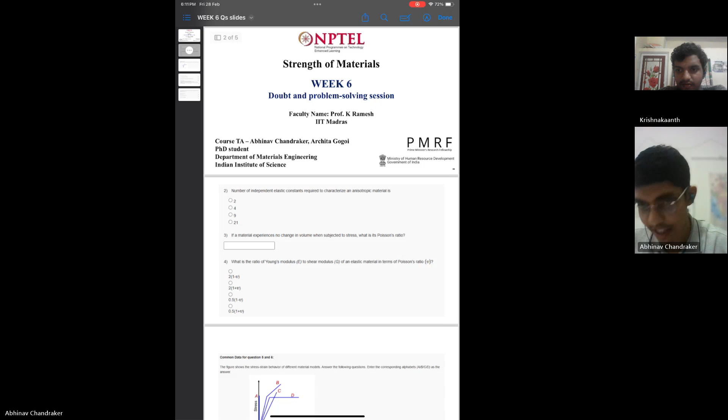So were you able to go through the video lectures? Yes, it's done. And actually, I wanted to complete the assignment within 6 o'clock, but it is only quarter done. Okay, I think if you have seen the video lectures, assignments are not so difficult, you can quickly go through them. The lectures are more time taking, slightly.

So let's just, I'll quickly summarize, I'll not take much time. Then, if you have some doubts or something you want to discuss, we can look at that.

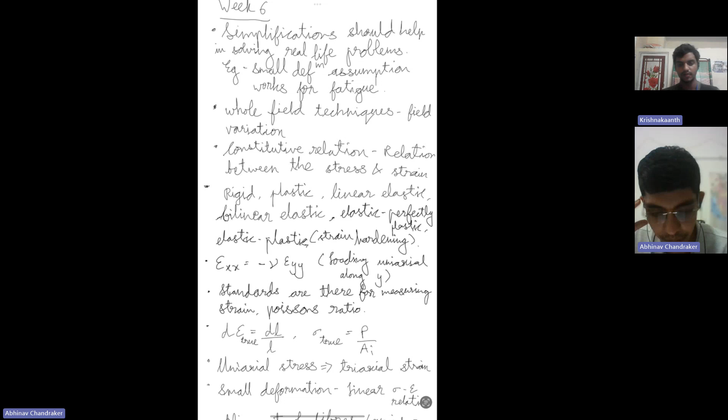So these are some points I had noted down which I felt were important. Firstly, most of the calculations or derivations we are doing are based on the assumption that we are considering only small deformation, so most of them are only applicable for linear elasticity. But these simplifications are also many times applicable for real life scenarios, for example in fatigue. So many times it's okay to make such simplifications.

Then we have certain techniques called whole field techniques, in which we can measure the variation at various points simultaneously, for example when measuring strains. So such kinds of techniques are called whole field techniques. You can also get the directional value of what you're measuring, as well as measure it at different points.

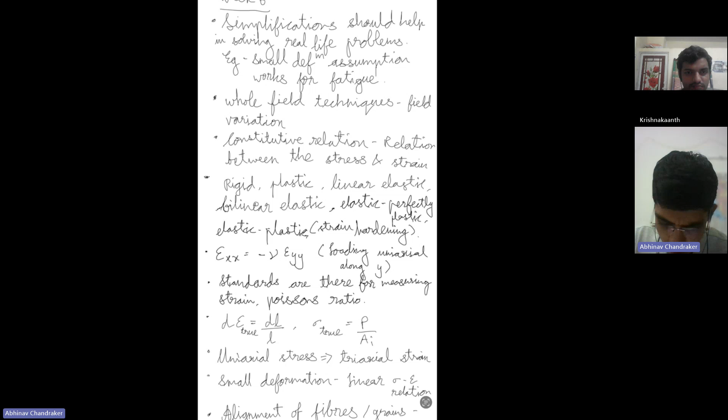Then there is something called constitutive relation. I'm not sure of the exact definition of it, but it's a relationship between different entities. For example, a relationship that you write between stress and strain, which is a theoretically developed relationship, is called a constitutive relation. We'll see what that relationship is in the next few points. If you have any questions related to any of these from the video lectures, you can ask me.

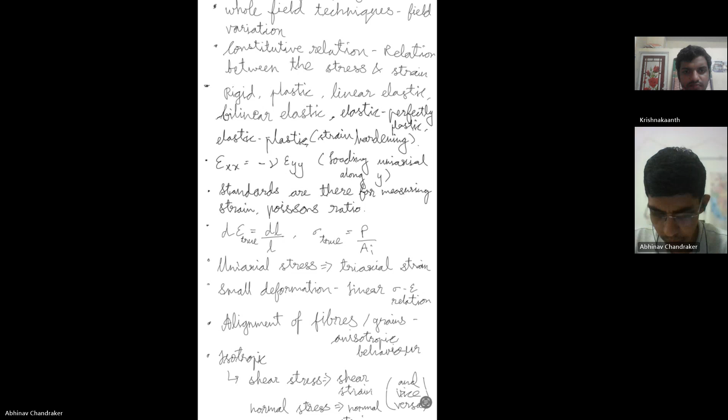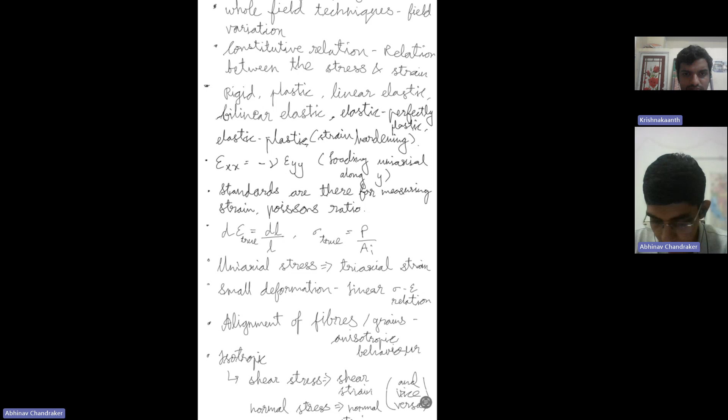Then in the lecture, sir has categorized the deformation behavior of different materials into some different buckets. Like you can have rigid materials which do not deform, then plastic materials which are 100% plastic, so they will deform without any requirement of higher stresses. We can have linear elastic, which show linear stress strain dependence. Then bilinear elastic, with two different slopes in their graph. Then it can be elastic followed by perfectly plastic, elastic plastic, which involves some strain hardening. So these are just some categorization, simplification of a kind for doing modeling or for using these assumptions for further modeling of materials.

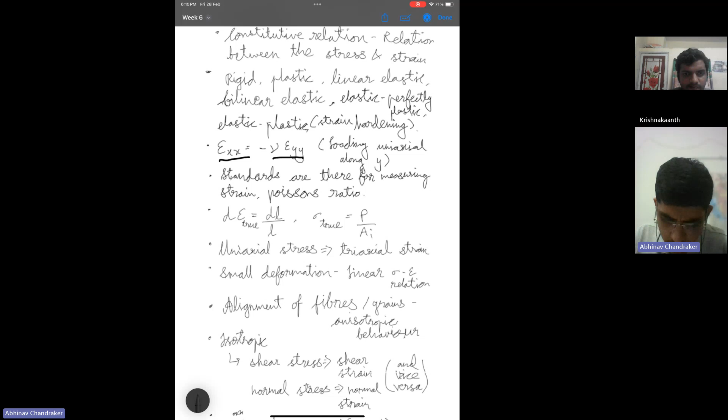Then we'll see the concept of nu, the Poisson's ratio, and this is the definition of it. It's negative of the strain in axial direction by... sorry, it should be the strain depends on how you load it. If it's along y, then it's negative of strain in x by strain in y. And it will be used a lot to form relations between stresses and strains.

Then we have certain standards for measuring them, just like we had standards which were discussed when covering strain gauges. Some bodies are there which come up with standards. Similarly, we also have standards for measurement of Poisson's ratio.

Sir briefly covered true stresses and true strains, which are somewhat different from the engineering stress and strains we were dealing with till now. These are more like instantaneous values. So d epsilon will be dl by L, where L is the instantaneous length. Similarly, you take the area in your sigma expression as the instantaneous cross-sectional area of the material.

Sir stressed that if you are applying uniaxial stress on any material, you should not assume that the strain also will be uniaxial, because due to Poisson's ratio, it will have some strain in the other directions also. So the strain will generally be triaxial.

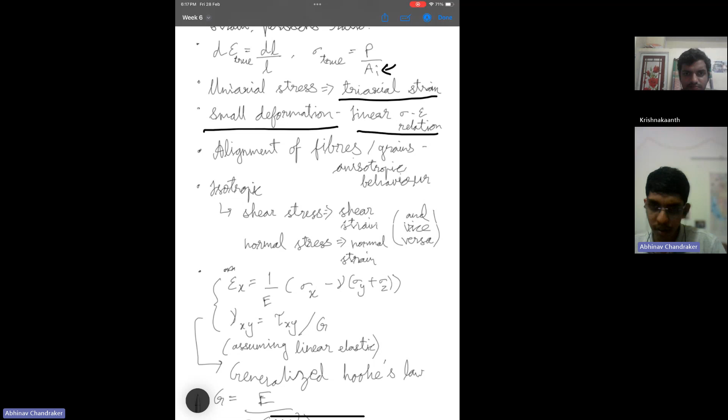Then we looked at how alignment of fibers or grains can lead to anisotropy in behavior, which can later lead to differences in the stress strain relationship. So if you want to model such materials, you have to take into account how the relationships between stresses and strains will change, because the elastic constants will change. All of those things have to be taken into account.

I think Krishnakaanth, some noise is coming from your mic, can you check? No sir. Might be construction going on at the neighboring house. Maybe just mute it if you are not speaking, otherwise in the recording also this noise will come up. If you have any doubts, even small things you might want to discuss, you can let me know.

Then one very important property of isotropic materials was discussed: if you are applying a shear stress on an isotropic material, you will get shear strain only, pure shear strain, and no normal components will be there. The same goes for normal stress, and vice versa. If you apply a normal strain, you'd only get normal stresses, no shear components.

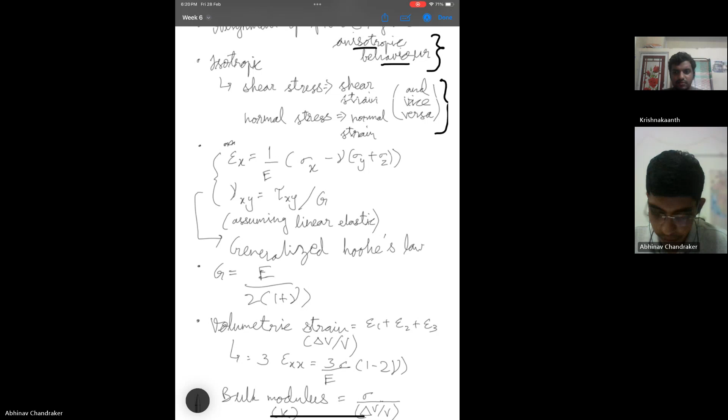Then we looked at, based on how Poisson's ratio was defined, how strain will be affected by stresses applied in different directions. Even stresses applied in y and z direction will affect the strains in x direction, since strain will be triaxial. So epsilon x can be written in this manner, and the shear strain can be written in this manner. Since this is isotropic, the shear stress only will have an effect on the shear strain, and normal stresses will be separate.

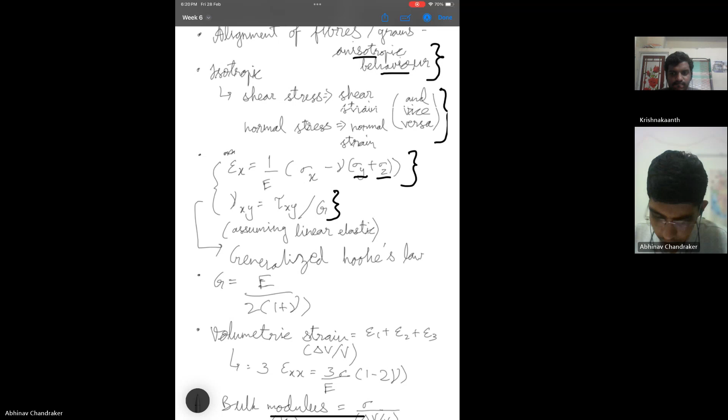This is called generalized Hooke's law. We'll see a more general form of this later when we look at the matrix form. Sir explained how we can derive the value of shear modulus, and its relationship to the elastic modulus, Young's modulus, and Poisson's ratio by looking at some simple cases. It comes out to be E by 2 into 1 plus mu.

Then the derivation for calculation of volumetric strain was covered. Volumetric strain is delta V by V, the change in volume upon loading divided by the original volume. If you consider small deformation, you can remove many of the terms which will come in the more exact expression, and you will just have these three strains in the final term: epsilon 1 plus epsilon 2 plus epsilon 3.

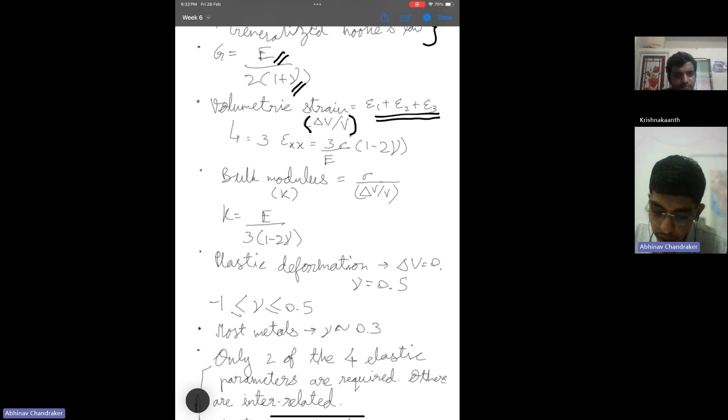And if it is a hydrostatic kind of stress, you will have all the values of strains same in all three directions. It will be 3 epsilon xx, and this can then be written as 3 sigma by E into 1 minus 2 mu, if you want to write it in terms of stresses.

The reason we can consider this as 3 epsilon xx is because only the hydrostatic stresses lead to volume change. The deviatoric stresses will not lead to volume change. So another way of understanding this is that only normal stresses can cause volume change. Shear stresses or shear strains will cause a shape change, but it will not lead to a change in the volume of your material.

Bulk modulus is also related to volume change. It tells you the ratio of the stress applied to the change in the relative volume. It is written as K. And this relationship was also explained by Sir in his derivation.

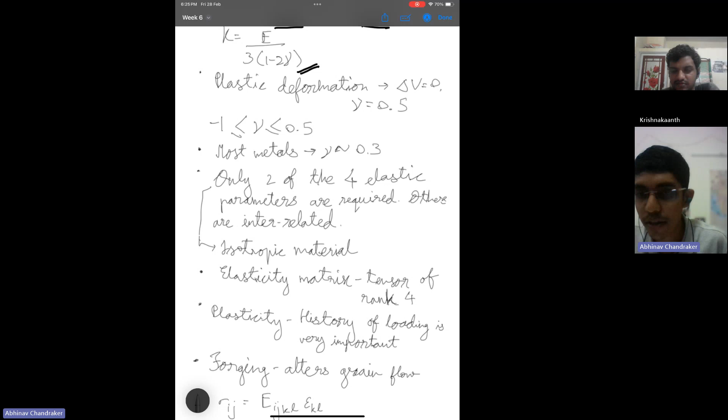We are also seeing the strain hardening case, which is also plasticity. Yeah, that is also plasticity. There, the necking will not start happening. There necking will start after what we call the instability point. I'll just show it through a notepad.

If you look at any typical stress strain curve... So you understand the point of instability. I think Sir did not mention this term in his videos, but what I mean is the ultimate tensile strength point, after which you will start seeing the necking.

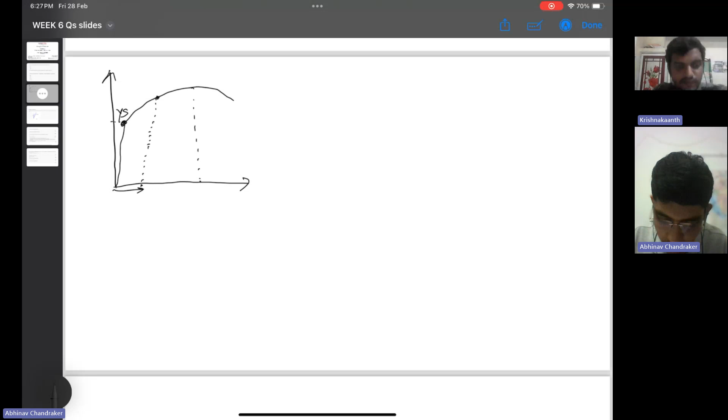Even before that, you have strain hardening, and that is also associated with plasticity. So how you can understand this concept is, let's say you were at this point, strain hardening started after the yield point. Let's call this YS. And here, if you just unload your material, it will come back like this. It will elastically relax, and some plastic deformation will be remaining. So this is the plastic deformation.

What we say is that this plastic deformation happened because some bonds inside the material broke, and there was some rearrangement in the atomic structures or atomic bonds, which led to the change in shape that we observe due to plastic deformation. But because it's just a rearrangement taking place, you do not have any stretching of bonds, because it has elastically relaxed. So after relaxation, there should not be any change in the volume of the material. I hope it made sense.

Let me just break it down once more. Let's say you are loading a material. You applied a load. Initially it only elastically deformed, so the bonds got stretched. No bonds were breaking. As it was elastically deformed, bonds got stretched, then you had some Poisson's ratio, according to which your material deformed, had strains in the axial and transverse directions. But that also involved some change in volume. When you are elastically deforming, most of the time there will be a change in volume, corresponding to your Poisson's ratio.

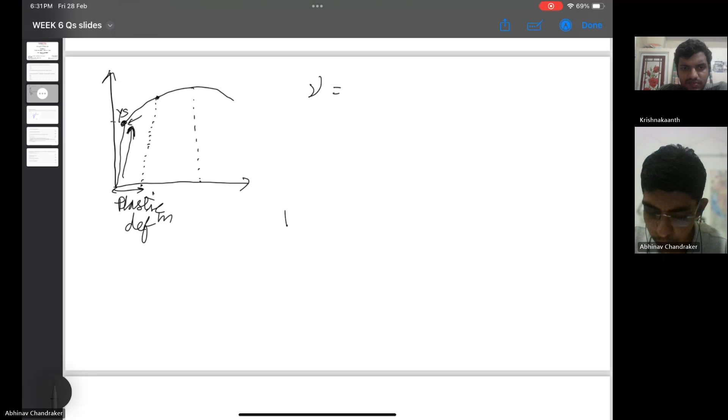So that is why we say that for plastic deformation, you have a Poisson's ratio value of 0.5, because this is associated with delta V equal to 0, right? And the reason this is so is because delta V by V is equal to epsilon 1 plus epsilon 2 plus epsilon 3.

While epsilon 2 will become minus 0.5 epsilon 1, if mu is equal to 0.5. Similarly, epsilon 3 will also become minus 0.5 into epsilon 1. So this will come out to be 0. So that's the simple explanation for it.

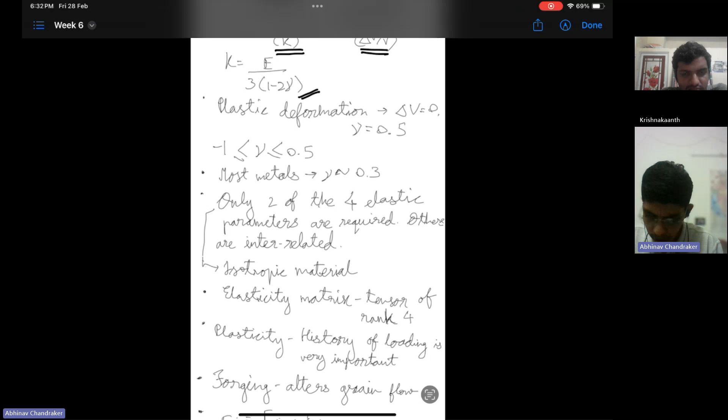Now, I think most things we have covered. For metals, it's usually about 0.3 when it is elastically deforming. For plastic, it's of course 0.5 only. And also mu will have a value between -1 and 0.5 based on some theoretical constraints.

So this was explained by sir, what is the reason for this. Also, for isotropic materials, among these four constants, only two of them are required to know about the elastic properties of the material. If you have any two, you can find the others because they are all interrelated. So these four are your Young's modulus, shear modulus, Poisson's ratio, and bulk modulus.

Now we come to elasticity matrix. So this is the matrix which relates the stress tensor to the strain tensor. Both stress and strain are tensors of rank 2, and the matrix that relates them is a tensor of rank 4.

So I don't know how much you know about tensors, but according to the mathematics, if you have two tensors of rank 2 and rank 2, then the tensor which relates both of them will always be of rank equal to 2 plus 2 equal to 4. So that is why the elasticity matrix is of rank 4.

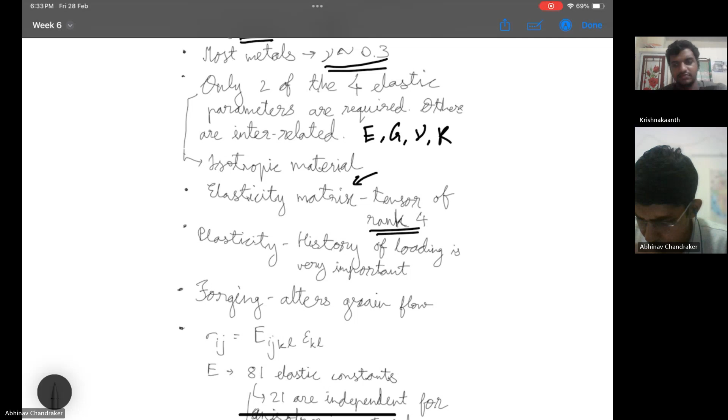That's all I'll cover about the elasticity matrix here. Then plasticity, sir told that the history of loading is very important, and the reason is somewhat the same as what I was discussing about the change in volume involved in plastic deformation, because when you load it and the material has deformed plastically, the microstructure or internal structure of the material has changed, in the sense that now your material will have some other defects in it. So that will lead to a change in the properties of that material.

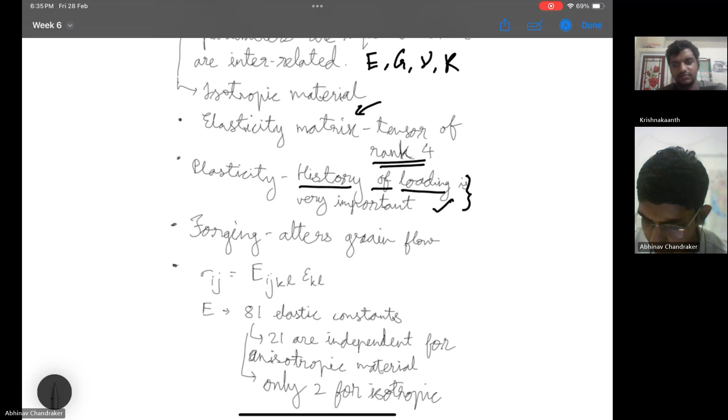And that is why sir had told that history of loading is very important. Since this course does not cover in detail the defects in a material which govern plastic deformation or the processes involved in plastic deformation, we need not look in more detail about this, but this is important. Then he also mentioned forging and how such processes can lead to change in your grain flow in case of metals. So this is also related to this thing only, history of loading.

And at the end, sir told a more general relationship between the stress tensor and strain tensor, and here we have the elasticity matrix. So since this is a rank 4 matrix, we have 81 elastic constants, and we can write it as a 9 into 9 matrix.

Among these constants, if we look at symmetry conditions due to symmetric matrices, there is also an energy relationship involved. So if we consider all of them... I think most of these things I'm telling are what sir has already told, so I'll quickly go through. If you have doubts, you let me know.

So if we remove those symmetry conditions, you will have only 21 left for an anisotropic material, and for isotropic materials some other things come up, so you end up with only two elastic constants which are independent. So that was all in the two lectures of week 6.

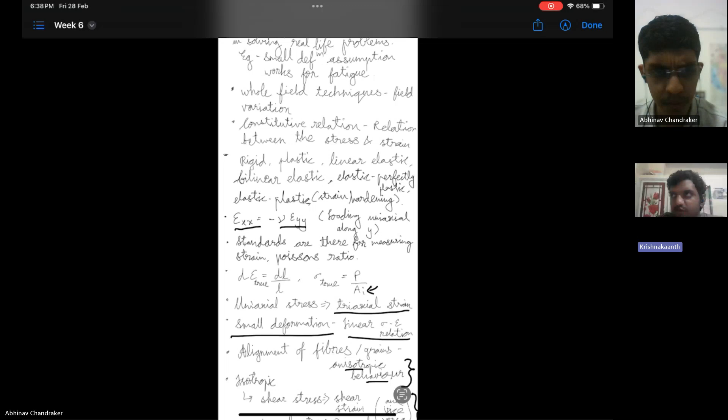Sir, while speaking about a tensor of rank 4, in previous week's clarification sessions we were told that a tensor of rank 0 shows only a scalar quantity, and a tensor of rank 1 shows scalar plus direction. A tensor of rank 2 shows scalar plus direction with respect to a plane. What does a tensor of rank 4 actually represent? That's a good question - how to better intuitively understand what it means. But actually I myself am not aware of exactly how to understand it. What I know is that it relates to tensors of rank 2, that's why it's called rank 4.

I think it's better if you ask Archita this question tomorrow, because she deals with tensors a lot and works mostly on computational things. So just mark it and ask her there. In case you feel your doubts are not getting resolved, you can post in the forum. I'll just see if there is something in the forum I'm not seeing. Actually, I forgot to check the forum this week.

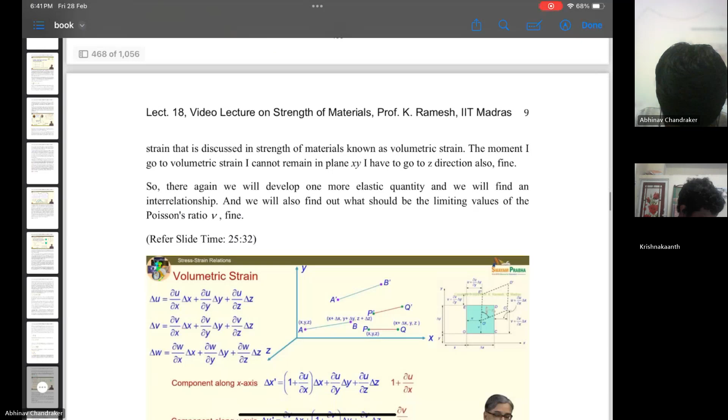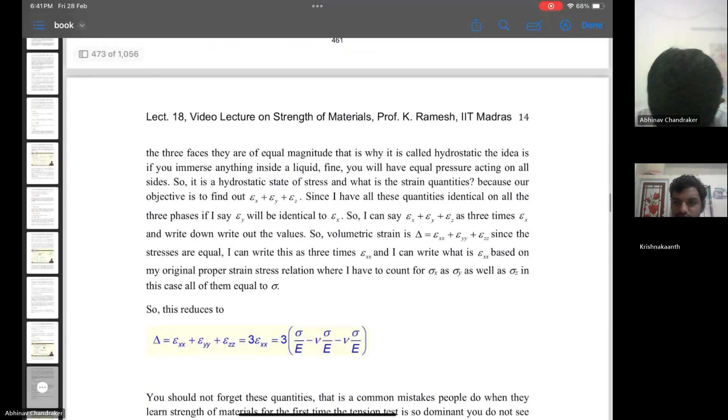I'll just open that portion. So, it was here.

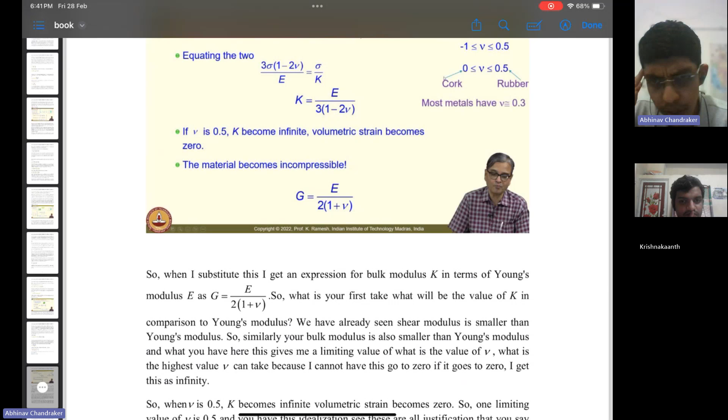So you understand that all these elastic constants like E, K, G, nu tell you some of the elastic properties of your material. For example, K - do you understand what K is telling you? K, I understood K is something called bulk modulus. And K is inversely proportional to compressibility. So bulk modulus tells you about the compressibility.

You are right, but you can intuitively understand it as: if you apply stress to your material, how it will lead to a volume change in the material. K is given by sigma divided by delta V by V. Just like you can understand Young's modulus as putting some uniaxial stress and seeing how the strain is affected, this is similar - here you are looking at the volumetric strain instead of the axial strain. So this is your volumetric strain, and K here is defined as sigma by delta.

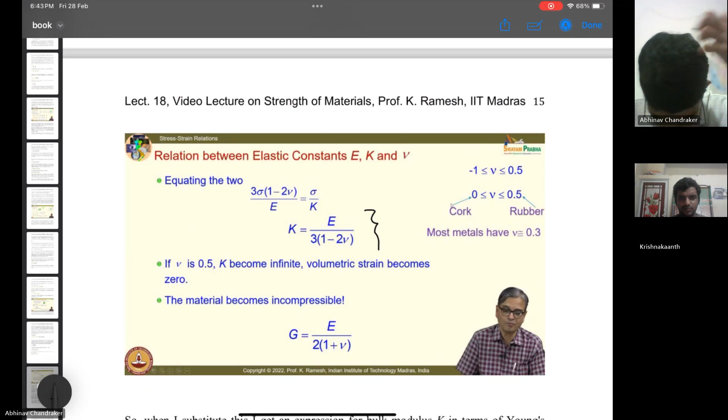So now that we know K and we have this relationship - these relationships come from some constitutive relations only. Do you have some idea what a constitutive relation is? I understood that it is a stress-strain relation. That's right, it's a stress-strain relation, but this is kind of a man-made relation. There is no way of proving that this is the actual relation. It is man-made, constructed to be able to use mathematics to understand how stresses and strains are connected. So the most basic of it is saying there is a Poisson ratio which connects your strains in one direction to the strains in another direction.

If you continue with those relations, you get these expressions, for example the one connecting E and nu with K. We know that any material which is compressed will have some reduction in volume, but it cannot increase in volume, so K cannot be negative. If it is very hard, it will not compress at all - you can call it incompressible. It's an extreme case, so if nu is equal to 0.5, that corresponds to K being infinity, meaning there is no volumetric strain even if you apply load. That is the extreme case - you cannot have a K that is negative. That is the reason nu cannot be more than 0.5.

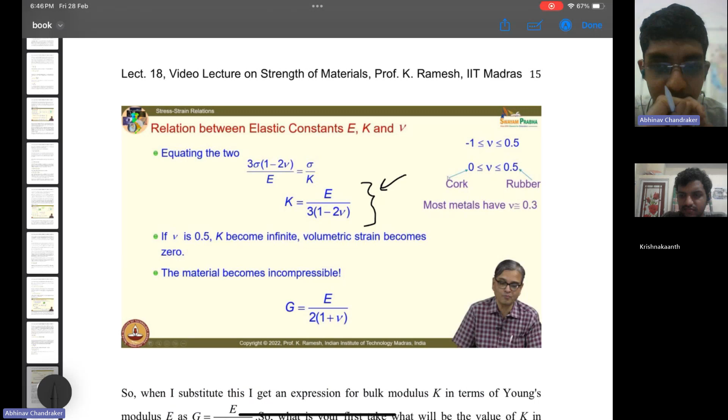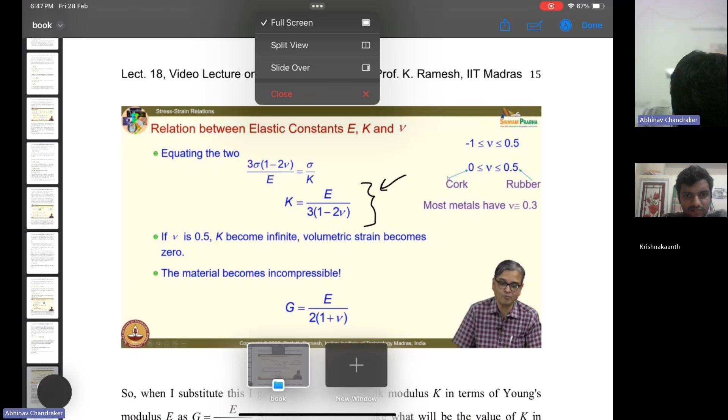But the reason we actually - if in your question also there's something you'll have to understand, so it's a very good question. I'll just show it here. When we are thinking about how K will change during plasticity...

We have seen that plasticity involves nu equal to 0.5, generally, because generally always it will involve nu equal to 0.5, at least for metal alloys, as far as I am aware. For other materials also it should hold. And now you have asked whether having an incompressible material will also mean that you are having plasticity - that the deformation is plastic.

I think one way to approach this question is that if you consider a simple case of elastic deformation - for example, you have some spherical material, you are loading it in a hydrostatic manner so you only have normal stresses, and then you see some deformation, and using that you calculate the value of K equal to sigma by delta. This is the classic definition of K, but this was considering only elasticity, so if you have some value of K, it is only for the elastic deformation that occurred.

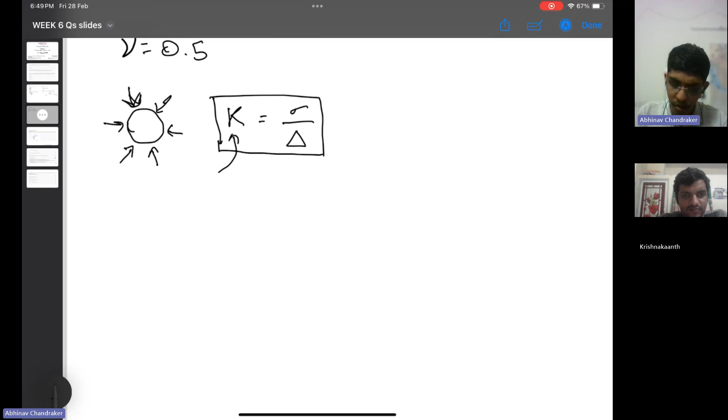But now if you want to consider plasticity, let's say you have some plastic deformation occurring - for example, in your tensile specimen, it plastically deformed to some extent. Here, plastic flow of material took place, so in a way there was some bond switching that took place, due to which the material elongated. But I wouldn't think it is wise to associate a bulk modulus with plastic flow, because all of these constants have been derived for linear elastic conditions, and all the interrelationships also.

So even the elastic matrix you saw, those are for applications involving elastic deformation, so you can relate between different stresses and strains acting. But when you have plastic flow taking place, in that case I think the definition of bulk modulus will not hold, or at least these relationships we have will not hold. So it might not be correct to just say that because during plastic flow you do not have a change in volume, the bulk modulus is infinity - the definition of bulk modulus will not hold there, or at least the relationship E upon 3, into 1 minus 2 nu, that will not hold. So we cannot say that it's incompressible if it's plastic.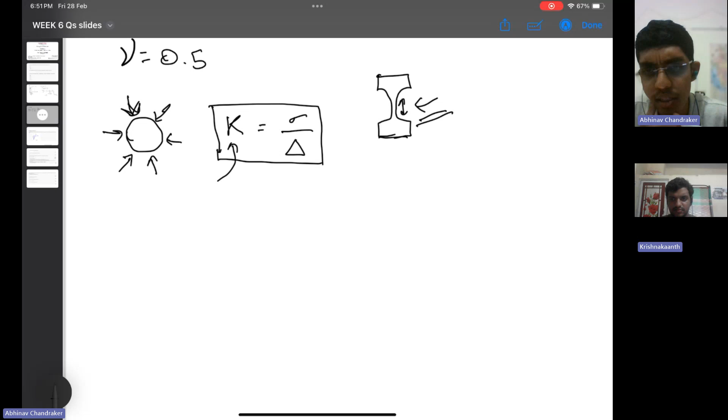It's a very good question. I had not thought of it before. I hope it was clear. If you have any further confusion, you can ask.

My understanding, how I understood it, is that we derived this equation assuming that the change is linear and it is an isotropic material. So applying the plastic Poisson's ratio and quoting some relation between plasticity in this equation, which had been derived for elastic conditions, is not acceptable.

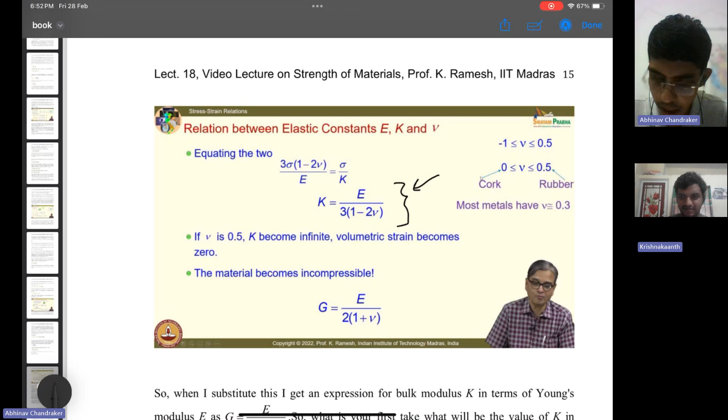Yeah, you are right. Also, another thing I'd like to clarify - when we say that a plastic material has a nu of 0.5, the way I said here, it's not very - I am not being true to the assumptions we are making of linear elastic deformation, because we started with that assumption, and based on that we have built up all of these concepts of elastic constants and their relationships. But here, when we are trying to calculate nu for plastic deformation, we are just seeing how minus epsilon xx by epsilon yy will change, or what will be the value of this expression when you are plastically deforming your material, because this is how we defined the value of nu. But in this case, we are not looking at elastic strains, we are looking at plastic strains.

Somehow it will come out that because there is no volume change, due to the physical reasoning I gave, nu will be equal to 0.5. But this value, you cannot directly compare to what you get during elastic deformation of a material. So a material which is elastically deforming and giving you 0.5 is behaving actually differently from one which is plastically deforming and giving nu 0.5. So this is not an apple to apple comparison, you can consider it an apple to orange comparison.

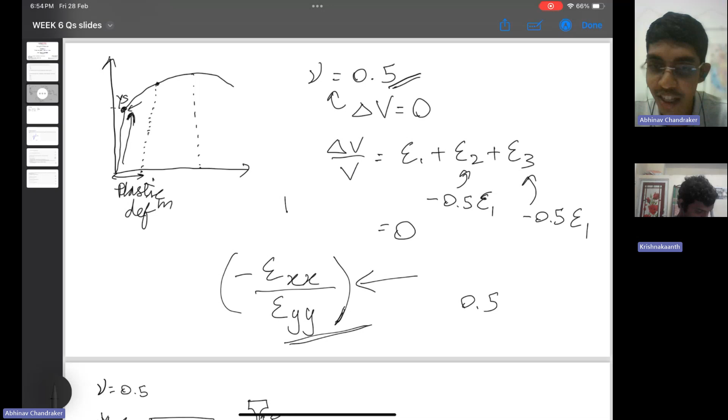But any other material will not give you that. A metal will not give you that. When it plastically deforms, based on how we are defining nu, the expression of nu, you will get 0.5 value. But that behavior is different from what happens for an elastically deforming material. So that discernment you will have to have. Sir did not explain this in detail, he just went over it. But that is something you will have to understand if you want to compare between the nu values.

If you have any question, confusion, you can let me know. Yes sir, I understand - nu 0.5 in elasticity is not equal to nu 0.5 in plasticity, so something else is also taking place in plasticity. In short, if you have confusion, you can tell me, then I can explain better.

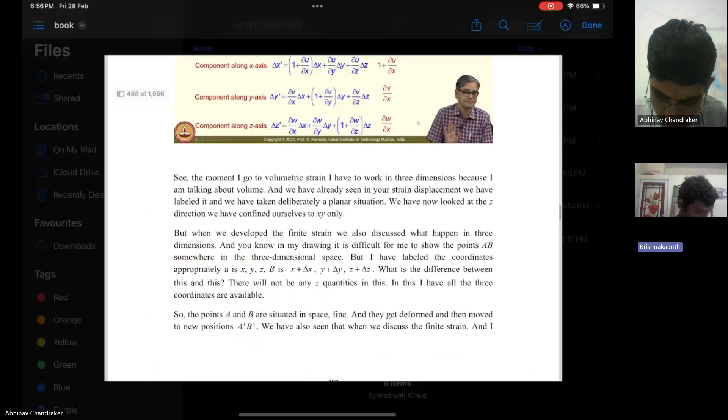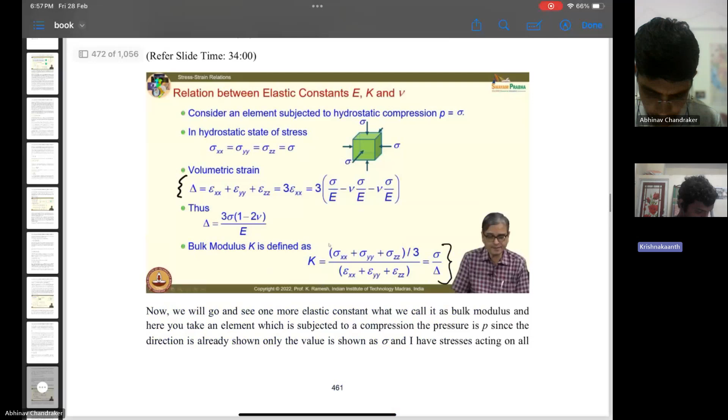Okay, so if this is resolved, then anything else, sir? There is some doubt in Bauschinger's effect. Washington's effect? Bauschinger's effect. Yeah, yeah, okay.

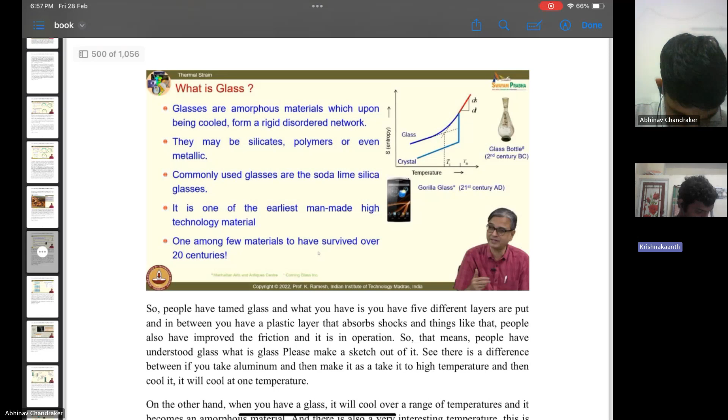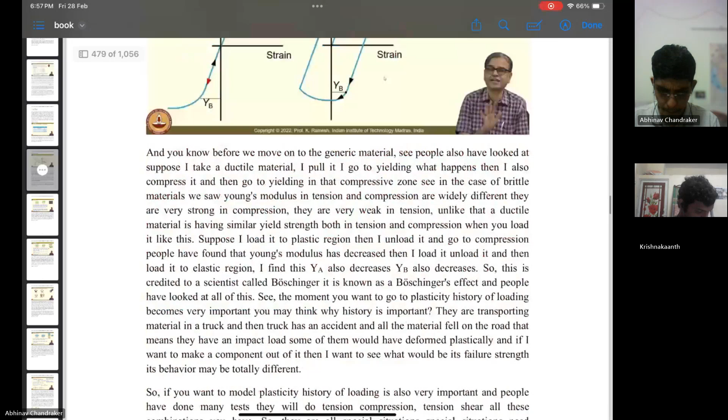Which lecture was it in? The second one. It's lecture - yes, second one. Lecture 18, I think this one, after Lamé's constant. Okay, Lamé - after Lamé's constant, Lamé's constant, yeah.

So here, sir has told that if you are deforming by tension, then again loading it in the opposite direction in compression, then reloading it, in that case the response you get will not be exactly the same. There will be a reduction in the stresses required to get the same value of strain as earlier. So maybe I can show it here.

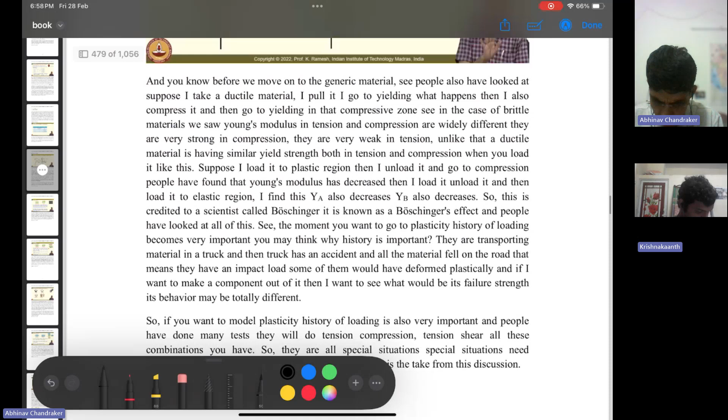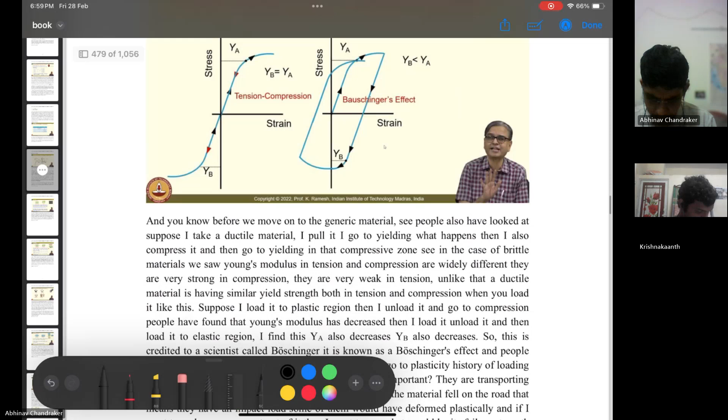Actually, this is not very accurate. Is there something particular that you have a doubt in? Yes sir, so this epsilon... Actually, here I think there is a small mistake in this lecture.

I also noticed it earlier. So here, sir says that there is a change in the Young's modulus when you are loading and unloading, and then reloading in the opposite direction. And this is called Bauschinger's effect.

But actually, even if you see in this plot, the second one, what you will see is that the slopes are all the same during loading, unloading, or reloading. So Young's modulus does not change in this kind of situation, since Young's modulus is a very fundamental quantity - it's associated with the strength of a bond when it is stretched or compressed. So it is not affected if you load and unload a material. What is actually affected is the strength that the material will show. So this is actually a kind of loading which is called fatigue.

This kind of plot will only become cyclic when there is some plastic deformation taking place in your material, which is understandable. When you relax your material, you have some residual strains.

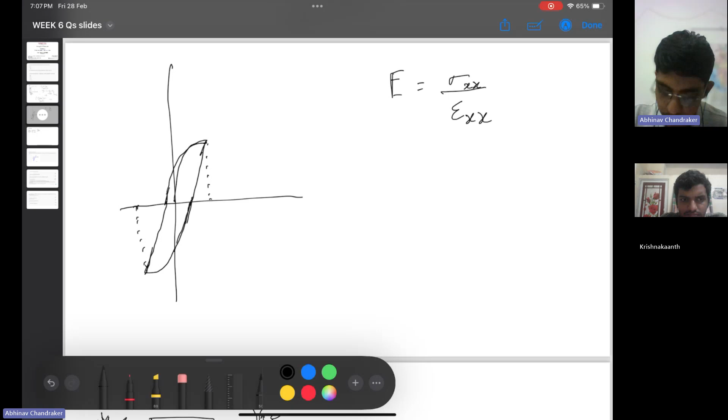But due to some internal processes occurring in the material - for example, I'll tell you for a constant strain loading, since some of my lab mates work on fatigue - what they observe is that if you have a constant strain at which you are loading and unloading, let's say epsilon value minus epsilon, then instead of this happening, normally you expect that the material will keep strain hardening as it is plastically deformed, right? The plastic strains will accumulate till UTS, right?

Sorry, till UTS. So plastic strains will keep accumulating and that will strain harden the material. The material will become stronger.

But what we see is that due to Bauschinger's effect, the material does not become as strong as we anticipated. So maybe it will go up slightly, since more stress is required to strain the material. So it will keep on going up, something like this. But after a point, some defect will originate which is big enough to make a crack propagate, and there it will fail.

So it might be this value, which will be much less than UTS. Let's say this is sigma, and this can be a very small strain. It could be maybe around 0.5% of strain, a constant strain at which we are loading and unloading, and even that, due to this effect, will lead to failure.

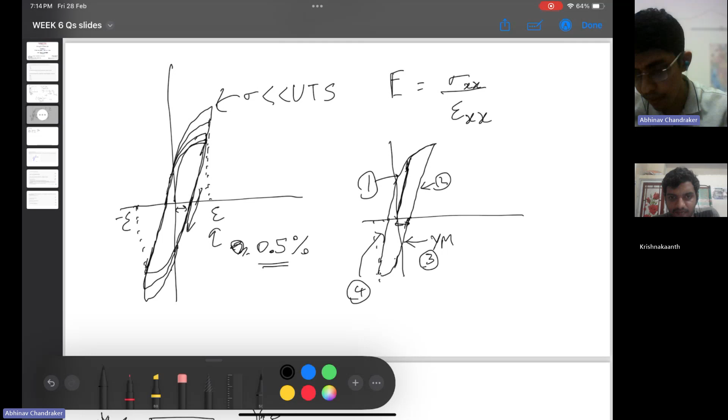No reason actually, there is no need to compare the Young's modulus. This was a mistake, as I told in the lecture, that the Young's modulus will change on compression or tension. That does not happen, so actually you need not even compare it.

What you need to focus on is the effect of plastic deformation and the effect of compressive repeated loading on the stresses and strains that you are getting, the response that the material is giving. So that is more important.

So normally, if you are studying plastic deformation during fatigue, what you will be interested in is how my material is responding to the repeated loading - what are the values of stresses and strains that I am getting after maybe the first cycle, or the first 100 cycles, 1000 cycles, 2000 cycles.

Usually, if you want to look in more detail, sir has not covered this - he just covered it for maybe a minute or so. But I have some lab mates working on this, so I know how they analyze their results. If you're curious, I can show you.

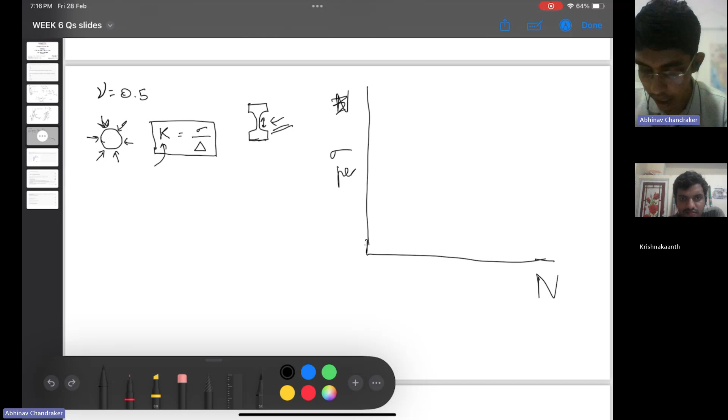If you have, let's say, number of cycles here and the sigma max, or sigma peak, the peak stress during a cycle - like I showed, you can have multiple cycles. During every cycle there is a peak stress at which you get the desired strain, then you compress it and take it in the other direction. What is usually observed is that it will start somewhere here, maybe at the zeroth cycle, it will be somewhere here.

It will increase a bit - not a linear increase, but based on internal processes. Then it tends to saturate. Then, because of some change in processes and structure in the material, at least in alloys, you will have hardening, then a softening process. Slowly, after a point, crack generation will take place, and then it will go down much more quickly.

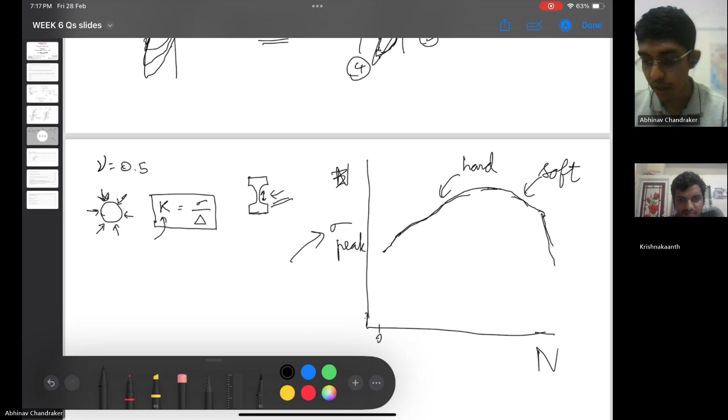So this is what we are interested in - how the peak stresses, or if you are doing strain control versus stress control, how the strain response is changing over time. For now you should correct yourself, and others who see this later, that Young's modulus will not be changing. Maybe I'll inform sir about this too.

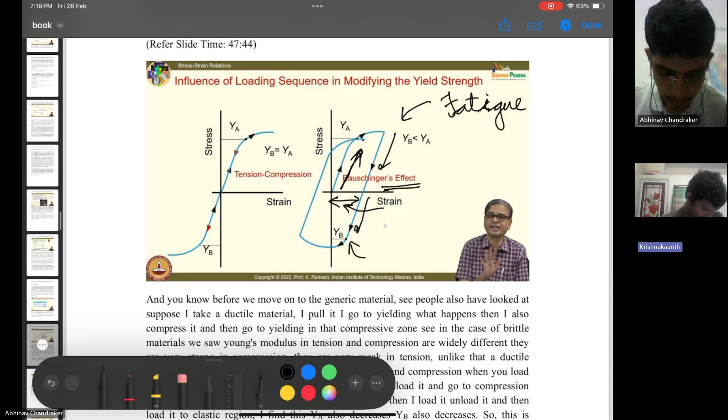Sir, can I get any gist regarding that ASTM D3039? Some gist points, just to hear what it actually states. Okay, I see, give me a minute, I'll note this down - page 20, mistake.

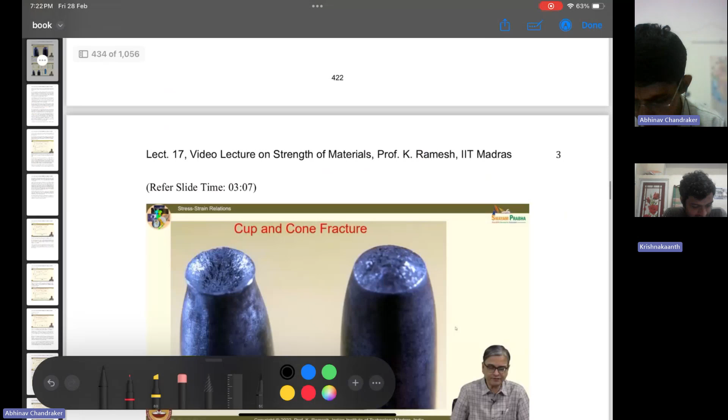Sir told that this would be for Poisson's ratio measurement, right, if we are keeping two strain gauges.

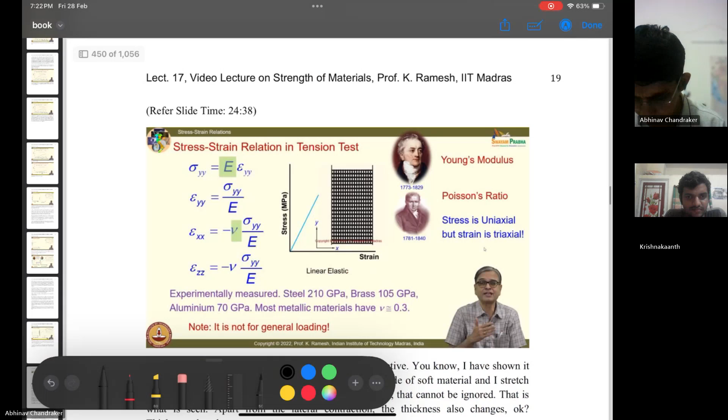Which slide is it? It's not here. ASTM standards.

So this explains what are the precautions that you have to take when you use two strain gauges and not this.

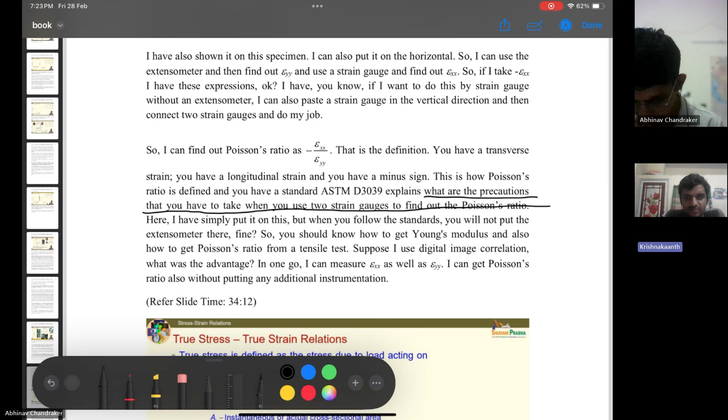Actually, I am also not aware, I'll have to check. Have you ever seen any ASTM? They have some short notes. They are kind of papers only, but it's more about explanation of a procedure of how you can measure something and what are the standards associated with that measurement. Maybe you can just look it up on the web, you'll be able to download that particular guideline, and if you have time, you can just try to see it. And then if you have any doubt, maybe just post in the forum with the associated content, you can put images or something.

Then I have seen this Mr. Ramesh, who is her student actually, he used to be the TA earlier for this course. He has answered some of these questions, and I think he answers with much more deeper understanding than those like me and Archita who are newer to this course. So it's good, I think you can keep posting there, it's good.

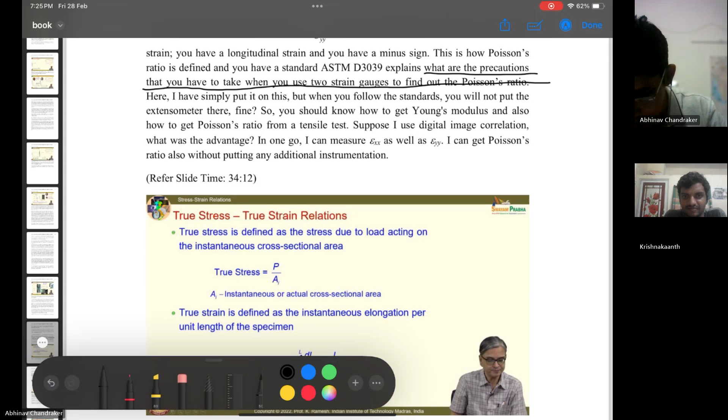And frankly, what I'll say from my experience is that the depth of understanding you're getting in this course, there are very few courses from which you'll be able to understand this much. Sir has been explaining things from various perspectives, from the very basic things he has been building up different concepts. So it's good that you are following it thoroughly.

Anything else you want me to look at, or we can look at the assignment questions directly? Yes sir, so the doubts for this week are done actually. Okay, good. And I have some doubts regarding previous week's assignment, some of my answers got wrong. Okay, maybe you can ask here also.

Regarding that stress strain curve, sir. Should I open that assignment from last week? So the stress strain curve, general MS stress strain curve, from the assignment you're saying, labeling, yes you have some doubt from the assignment.

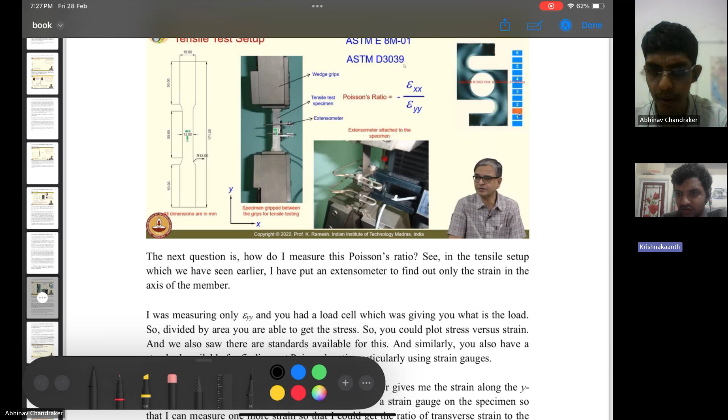So there we will be labeling something like proportionality limit, elastic limit, higher yield strength, lower yield point, UTS, and fracture. Sir, am I audible? Hello, sorry I think some connection issue was there. So in the stress strain curve for a mild steel specimen, we will be having some proportionality limit, elastic limit, higher yield point, lower yield point, UTS, and fracture. Okay, so proportionality limit is where Hooke's law is valid, so the slope will be linear.

Till where Hooke's law is valid, yes, till there it should be linear. Then till elastic limit, there should be a slope with a slight change in the curve pattern. There can be some slope because there we are concerned only with elasticity, not with proportionality. So B becomes the right answer now, because till A the slope is perfectly linear.

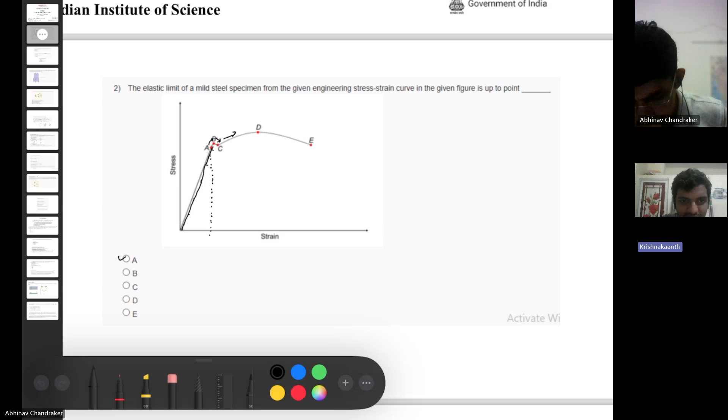I see, yeah. So I thought A should be the proportionality limit, and B should be the elastic limit, and C is the lower yield point. So I considered B, and it got wrong. Okay, I see.

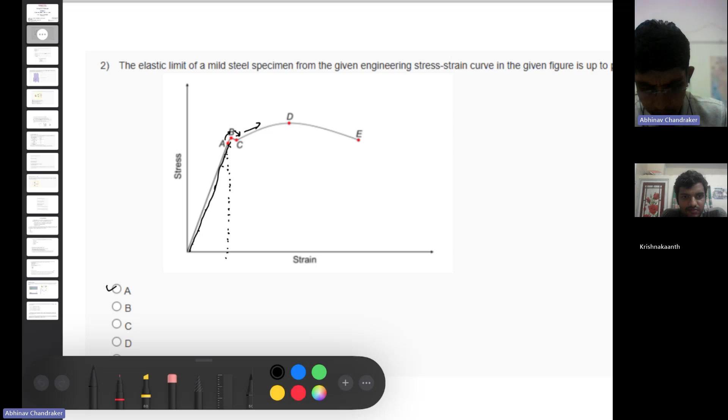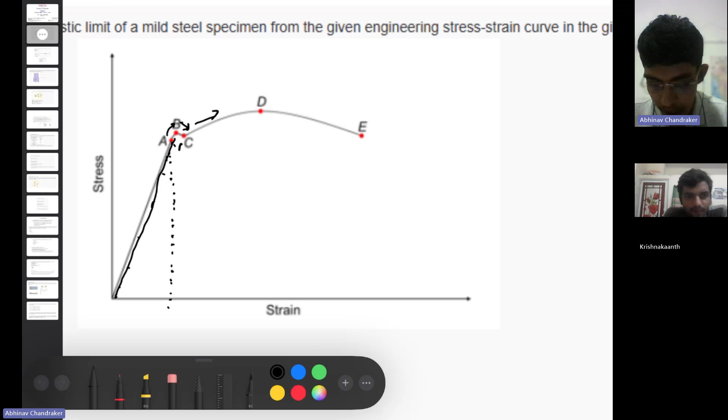Actually, for mild steel, they are saying A is the answer. So my understanding of why the answer should be A is because of what happens in mild steel or similar steels, where you see this kind of phenomena. I think this is called the yield point phenomena, or we also call it Cottrell atmosphere, which those who study metallurgy or materials engineering are aware of. The reason we have a lowering or dip in the stress-strain curve, followed by an increase again, is also called the yield point phenomena. So what happens here is...

Initially you have a kind of linear slope, so we can call it just elastic deformation. Then, if I zoom this up, it will show slight plastic deformation - some plasticity will take place in the material theoretically. After that, due to certain reasons I don't want to get into in detail, there are certain solute atoms in mild steel which are restricting the movement of some dislocations, and because of that plastic deformation becomes difficult. So you will see an increase in stress response because more stress is required to make your material flow or cause strain.

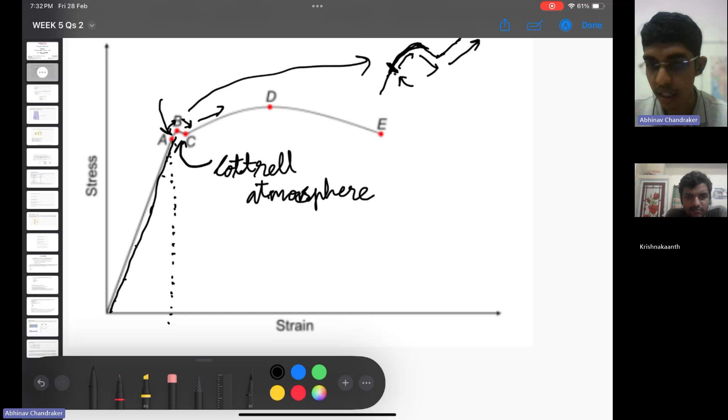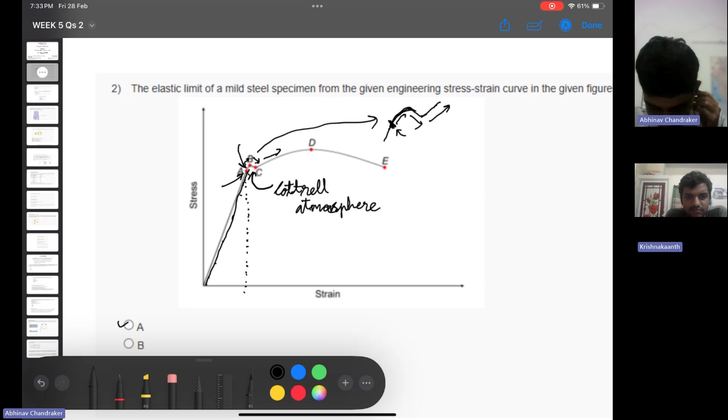So because of this, you can consider this as your proportionality limit as well as maybe elastic limit. These are not very scientific terms - they're more for application purposes, because they can vary here and there based on your material, or even for the same material with different specimens. There's no very scientific way of defining them. So I think you can just consider A to be where plasticity will start, which is why you can call this the elastic limit. As for the proportionality limit, I think you can just call A the proportionality limit also.

From what I think - you might have studied or read online that it's explained differently: initially the linear region you consider as elastic, at the end you have the elastic limit, then a little more elastic deformation which is not linear, so that would be the proportionality limit, then the next one is the elastic limit, after which you have plastic deformation starting. Usually that is how they explain it - it may not look exactly like this. So this would be elastic limit, proportionality limit, and yielding would also be here somewhere, I'm not sure - somewhere after or at the elastic limit, then plastic deformation starts.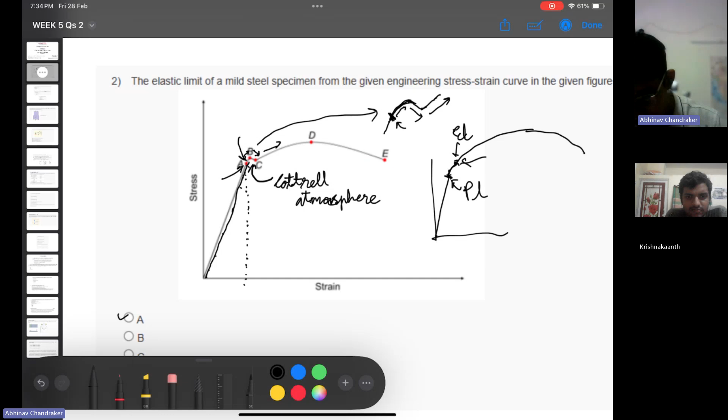But these are just some terminologies that we use. As I said, these elastic limit or plastic or proportionality limit, these are just some terminologies to make our understanding simple from an application point of view. These are not very scientific terms actually.

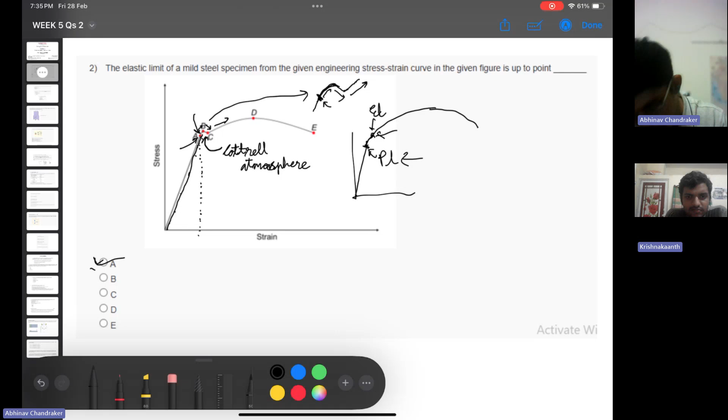But for this question, I think maybe Ganesh, who is a student, can also give his opinion on it. You can just post it in the discussion forum if you're still doubtful, and maybe he can give his view on whether A should be the correct answer or not. What I'd suggest is just take a snapshot of this and put it in the discussion forum, mention that it's belonging to this particular week's assignment, and then he can give you his opinion.

I feel for now A should be okay. B should also be okay. So as I told, in case of mild steel, you have this kind of behavior. The professor did not explain this, but you have this kind of thing where you have plastic deformation till some peak stress, then there will be unloading, and then again it will increase. So this is also considered plastic, at least for mild steel. That's why I said it should be A.

In case of confusion, you can post and see. So, whole field measurement - what is the answer to this? I said actually it is like DIC only, but why not photoelastic? Because they didn't specifically mention whether it should be done throughout or till yielding. They didn't mention it. So someone could even think we are making it for a ductile material. So for ductile material, yielding should not happen. Till yielding only we are going to measure, and applying photoelasticity should work - it's applied in some fields, like we can take landing gears. So why not photoelasticity? Because DIC will not work here.

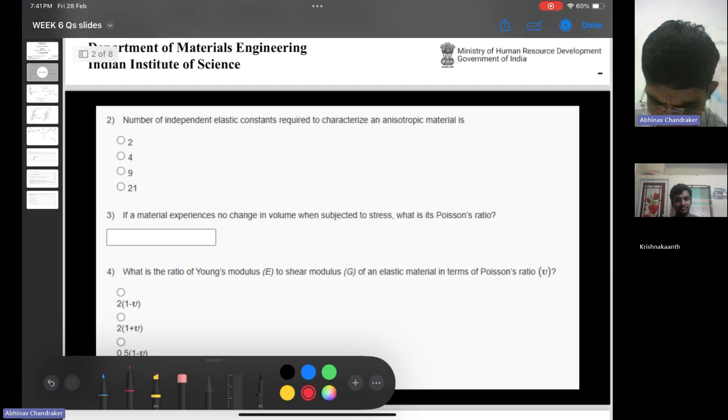So should we look at the week 6 question? There aren't many questions here, fewer for some reason. So quickly, I think you can answer all of these easily since you've gone through the lectures.

The number of independent elastic constants applied to anisotropic material are at least 21. That's correct, 21 is the answer.

If a material experiences no change in volume when subjected to stress, what must the Poisson's ratio be? Point five. Point 5, yeah. So what must become infinity? Yes.

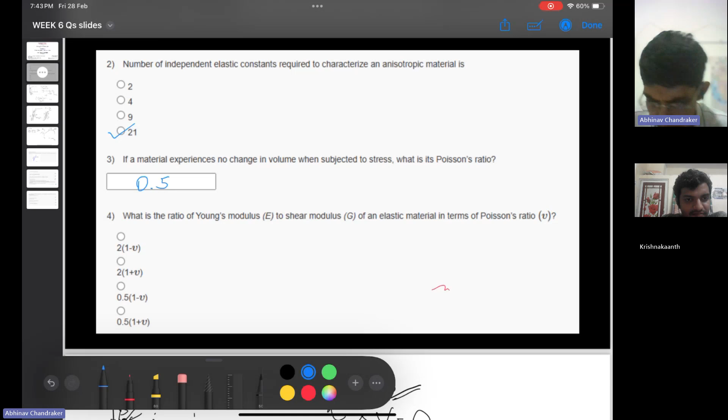What is the ratio of Young's modulus to shear modulus of an elastic material in terms of Poisson's ratio? G equals E by 2 of 1 minus mu. Ah, A, 2 of 1 minus mu. Is this the expression?

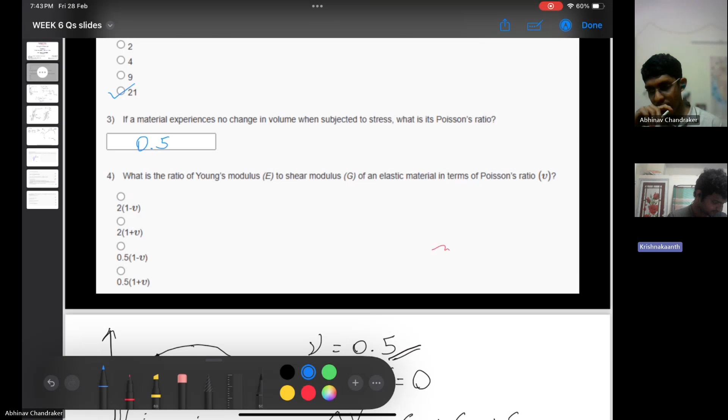I think it's 1 plus mu. G equals E by... let me check. 1 plus mu, can you just check once? 1 plus mu, right? Okay.

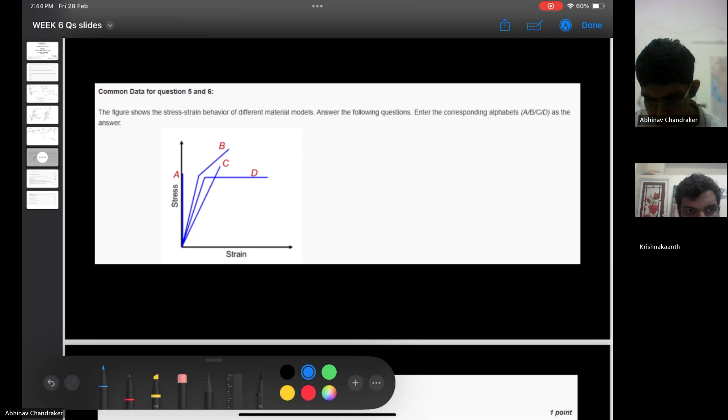The figure shows the stress strain behavior of different materials. Answer the following question, entering the corresponding alphabets A, B, C, D as answers. Strain hardening, perfect. So we have to tell for rigid material and elastic perfectly plastic material which of the points these will correspond to.

5 will be A and 6 will be D. 6 will be D, elastic, perfectly plastic, D. You're saying fifth will be... fifth will be rigid, A. Rigid material will be A. Okay, A and D.

What is the Poisson's ratio of a material for which the modulus of rigidity is equal to bulk modulus?

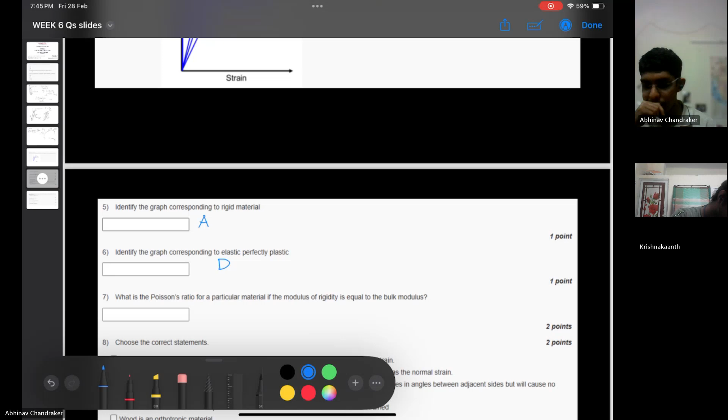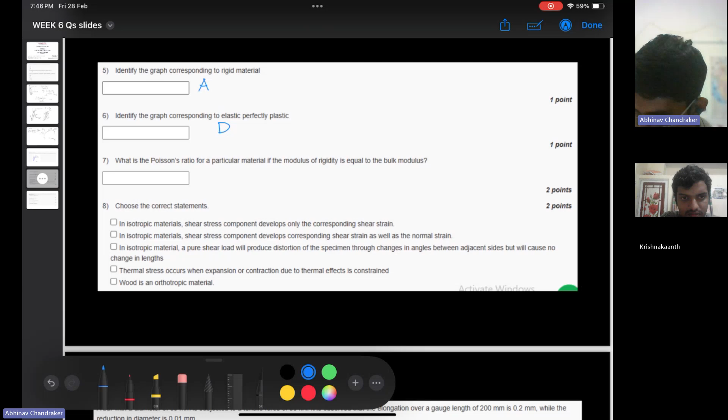Just a minute. Sir, will it be like minus 1 by 8? Is it right, minus 1 by 8? You're saying minus 1 by 8, is it correct? Actually, I myself have not calculated it yet. Can you tell me what reasoning or steps you followed?

Basically, equating the equations: G equals E divided by 2 of 1 plus nu, and K equals E by 3 of 1 minus 2 nu. So equating these two, E gets cancelled, and 3 minus 6 nu will be equal to 2 plus 2 nu, so I get minus 8 nu.

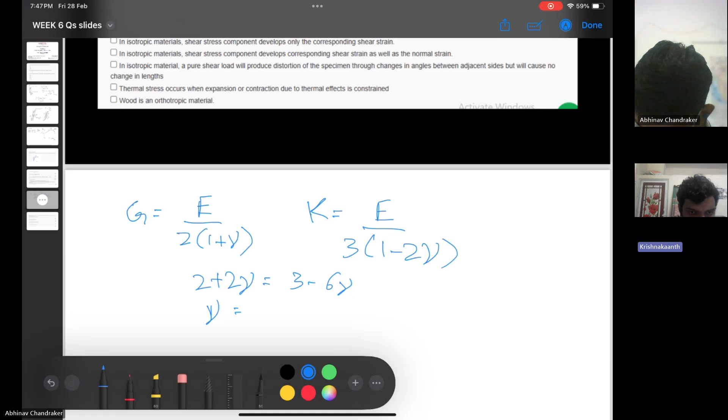Oh shit, I did something wrong. It's actually plus 1 by 8. Yeah, it will be plus 1 by 8. So this way you can say it's plus 1 by 8.

Likewise, I got 6 marks gone because of sign conventions in the previous assignment. Every answer was correct, but by typing I made it minus. I see, 6 marks gone. I think the end term has much more weightage for this course, right? Assignments must be important too, but I will not make those mistakes again, just do it more slowly, that way it's better.

Choose the correct statements. In isotropic materials, shear stress corresponds to development of shear strain. Yes.

In isotropic materials, shear component corresponds to shear strain as well as normal strain. No. In isotropic material, pure shear load will produce distortion of the specimen through changes in angle between the adjacent sides, which cause no changes in length. Thermal stress occurs when expansion or contraction due to thermal effects is constrained.

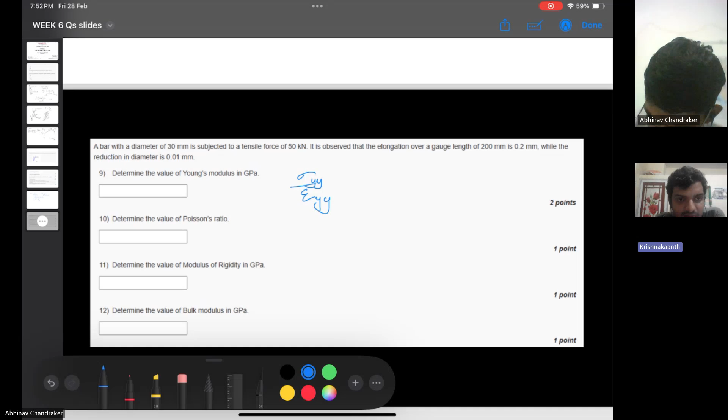We will be getting stress, and stress by the strain, like del L by L, 0.2 by 200, we will be getting strain. So stress by strain we will be getting Young's modulus, and for Poisson's ratio, we are having diameter and reduction in diameter, and the length plus increase in length. So by epsilon xx by epsilon yy, we will be getting Poisson's ratio, negative epsilon xx by epsilon yy.

It will be negative, but if you're considering the signs also, then it's positive. But yeah, you will have to take it as negative since it will be in reduction.

Now for question 11 and 12, to determine the value of modulus of rigidity, we can calculate it using E by 2 of 1 plus nu. So it's the same approach for bulk modulus, E by 3 of 1 minus 2 nu.

That's all for the assignments for this content. For thermal strains, you have some more questions - maybe two or three other questions on thermal stress, I guess. The last question is pending, sir, on the calculation parts - a bit confused regarding that mechanics.

Okay, fine, so I think we can close the session now.